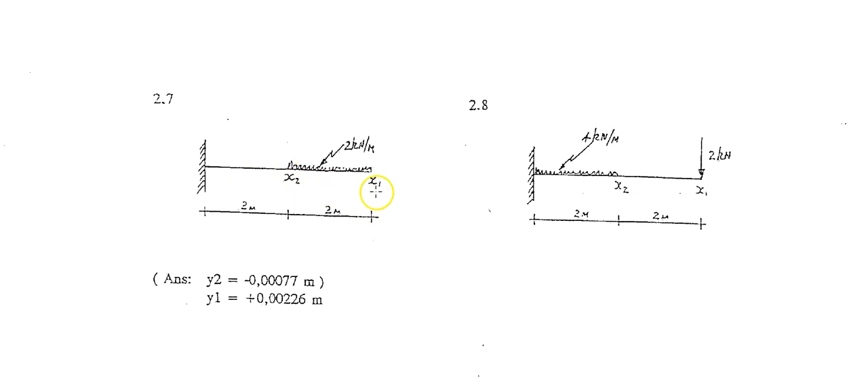Because it's bending down like so, there's a slight deflection, and the biggest deflection will be at x1, which is y1. Right, I've drawn it there.

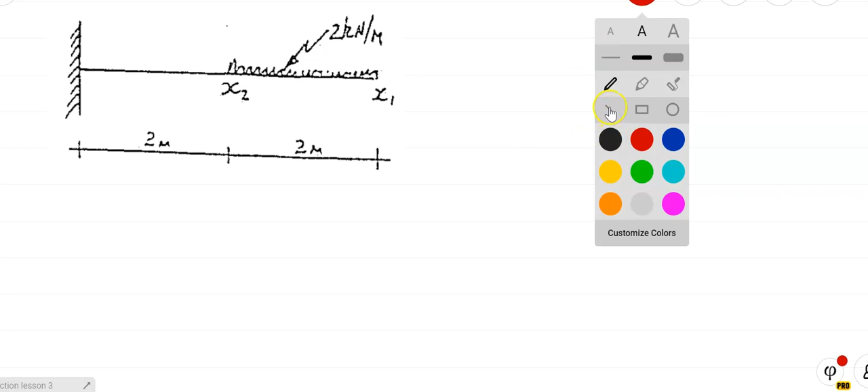So before we can start, we need to calculate the support reaction. There's definitely going to be a VA, like so. I'm going to call that V, let's call it A. Okay, VA.

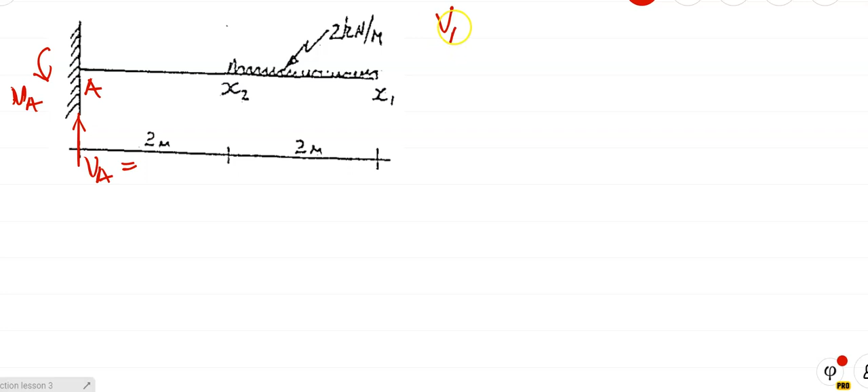And of course, there's definitely going to be a reaction moment like so. Because the beam wants to turn this way, the reaction will go the opposite way. VA is easy - by inspection, VA will be 2 times 2, which is 4 kilonewtons, going up.

Sum of the moments about A is equal to 0. So that's an anti-clockwise reaction moment, plus the one on the beam will be 2 times 2 times the lever arm. The lever arm goes to the center, so it's plus 2 times 2 times 3, plus the value times the length times the lever arm, which equals 0. Therefore, the moment at A is equal to 12 kilonewton meters. Quite easy, no?

Yes, very easy compared to the previous one. So it's 12 kilonewton meters.

And as we said before, we're going to take moments about the right hand end. So X is starting from there and going the other way. I'm taking moments on the right hand end, and by the way, E is given in the problem as 200 gigapascals, which is the same as 200,000 Newtons per millimeter squared. You should know that by now.

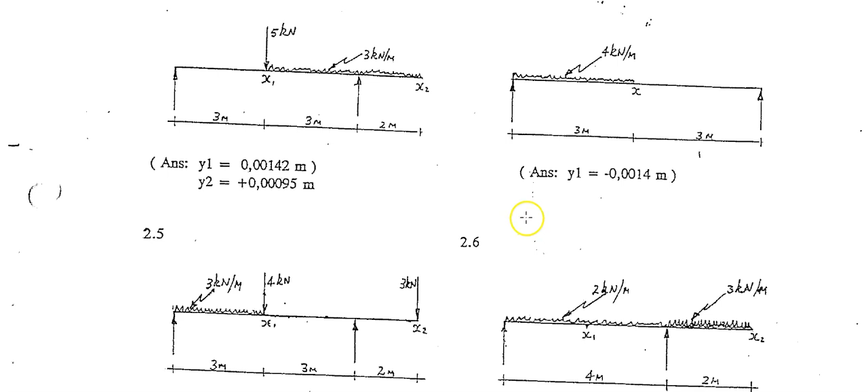Now, if I flick back to the notes, it says the beam width and I section is that. So what we need to do is go to the steel table and pick out section 356 by 171 by 44.8. From that value, I see that Ixx is equal to 121 times 10 to the power 6 millimeters to the 4th. So it's not given, you need to pick it out from steel tables.

I'm taking moments about the right hand end of the beam, and I'm going to set up my bending moment equation in terms of Macaulay. Let me change the color. So I'm going to say the moment at X can be written as EI, d squared y dx squared.

I'm taking moments right here. At the left hand end there, I have a moment of 12, but it's an anti-clockwise moment, so it's minus 12. At the left hand end, I've got a moment of minus 12 kilonewton meters.

Moment with regard to that force there, it will be plus VA times - remember all distances are in terms of x - so it's times x, that's it, times x.

And the UDL is anti-clockwise with respect to the right hand end of the beam, so it's minus 2 times, what's the length of it in terms of x, x minus 2, times half of x minus 2. Remember, the UDL has gone to the end of the beam, so it's 2 times x minus 2 times the distance from there to there, which is half of x minus 2, so therefore it's x minus 2 all squared. So that's the bending moment equation.

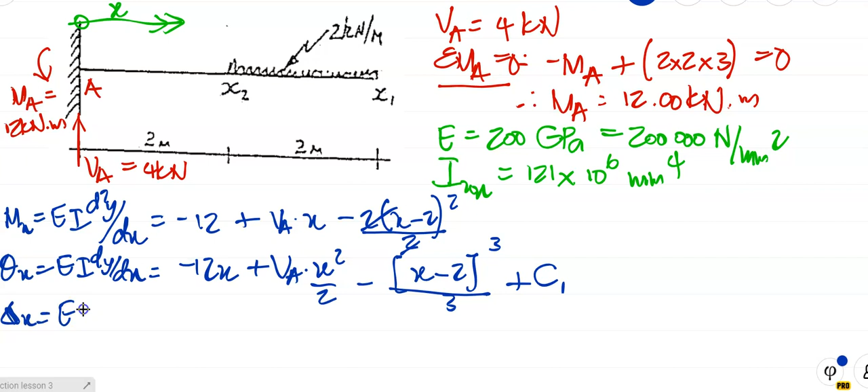...deflection equation. So it's EIY is minus 12 x squared over 2, plus VA times x cubed over 6, minus x minus 2, keep the bracket square, to the power of 4 over 12, and of course when you integrate the constant it becomes C1 times x, plus we get a second constant of integration and we call it C2.

We need to determine C1, C2, and once we know C1, C2, if we put the value of x in, we can determine y, because we know what E and I is. But we're going to do that at the boundaries, along a boundary condition.

What do we know? We know that at A, the deflection, sorry, at A, x is equal to 0, and y is also equal to 0, because it's been held in place there. So it's not going anywhere. So at A, x is 0, y is 0.

I'm putting all of this into that. So that's going to be 0, that's going to be 0, that's going to be negative, so it's 0, that's going to be 0, that's going to be 0, so therefore naught is equal to C2. So C2 is 0. So our first constant of integration, C2, is 0.

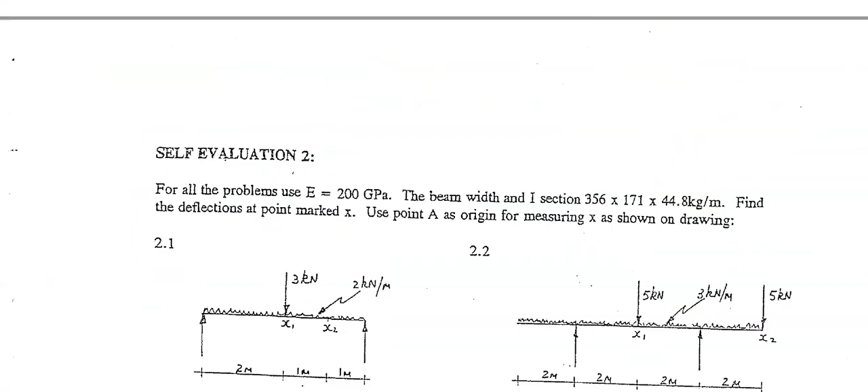And I get minus, why is it minus? Because it's deflecting down, it's below the zero line. Minus 2.26 millimeters. Okay, and if I go back to the answers, there we go, X1 is Y1, the deflection at X1. If I multiply that by 1000, I get 2.26 millimeters. So that's correct. So the deflection at the far end is 2.26 millimeters.

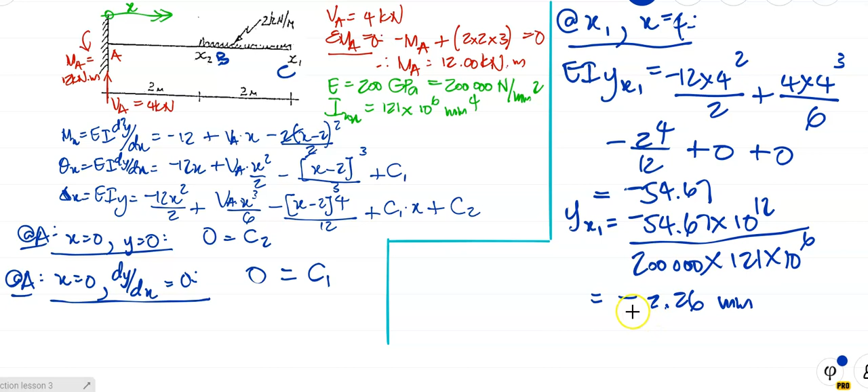The next one, the question says find the deflection at B. We do the same thing, but X is equal to 2. So at B, or at X2, X is equal to 2. Do the same thing, see what you get. So I'm going to say at X2, or B, or B if we wanted that. X is equal to 2 meters.

And because we want to find the deflection, we put this in the deflection equation. So I'm going to put X equal to 2 in that equation there. So EI, so EIY at X2 is equal to minus 12 times 2 squared over 2, plus VA, and what's V? V is 4, so plus 4 times X cubed, X is 2, so it's 2 cubed over 6. That's going to be zero, so it falls away. That's going to be naught, that's going to be naught, so it's just that there.

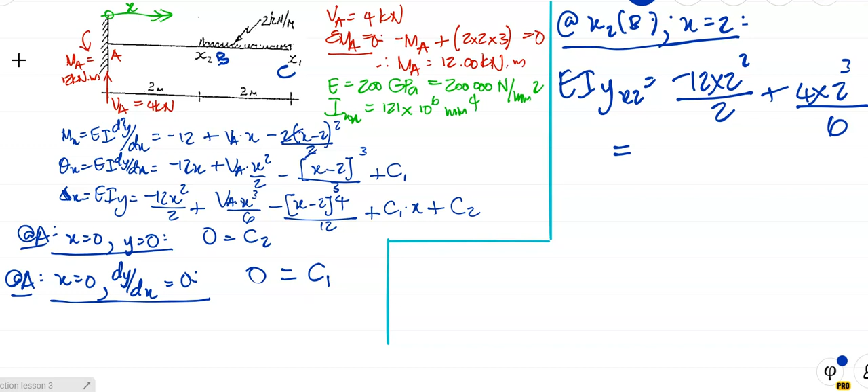Okay, so check what I get. And you should have gotten minus 18.67. And of course, now we're making Y the subject of the formula because we want to find the deflection. So Y at X2 is equal to minus 18.67 times the conversion factor, over EI, which is 200,000, and I is 121 times 10 to the power 6. Check my answer, you should have gotten minus 0.77 millimeters. And if I flick back to the answer, that's 0.77 millimeters there. Okay, that should actually be a minus there, not a plus.

Okay, so people, that is our, notice that cantilever is a bit shorter, not so much work. But the only essential difference is, remember, when we sum moments there, if the fixed end is on the left side, do not say minus 12 times X, that will be wrong, that will become minus 12X squared over 2, and that's all wrong. We're summing moments, the 12 is already a moment, so we just record it as that, and of course that's force times distance, and that's force times distance. Get the moment formula there, integrate twice, and then put in the values at the boundary conditions.

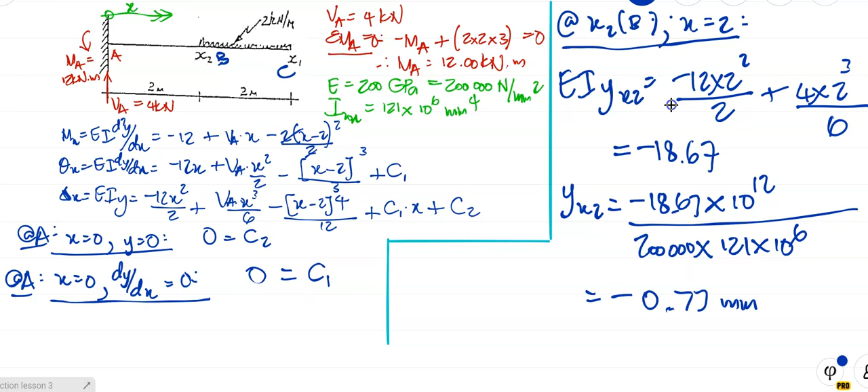If I go back to the notes there, oops, that's a bit too fast, didn't I? It went a bit nuts there.

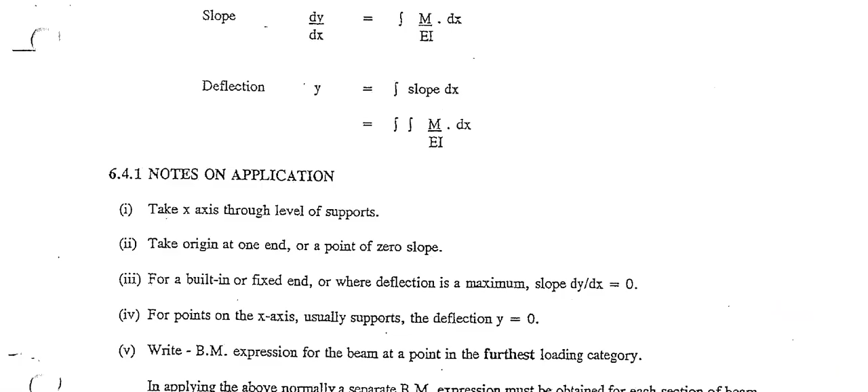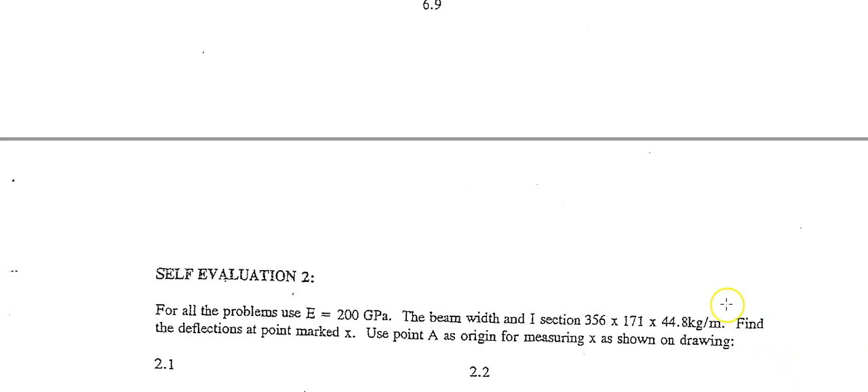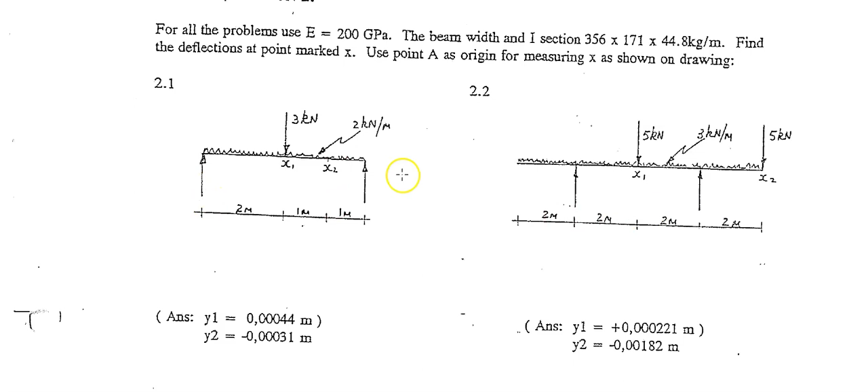6.10, right? Okay, so on page 6.10, self-evaluation, there's beams there. So work through all the ones I gave you in my handout there, and also work with these ones here, X1, X2. X1, the corresponding deflection at X1 will be Y1, so that means the deflection at X1 there is 0.44 millimeters, and at Y2 there it is 0.31 millimeters, or you can leave it as meters, just don't get the units mixed up. Okay, there's the beams, there's the answers. Find the deflection at all the X1s and X2s, and the answers there are given for all of those ones.

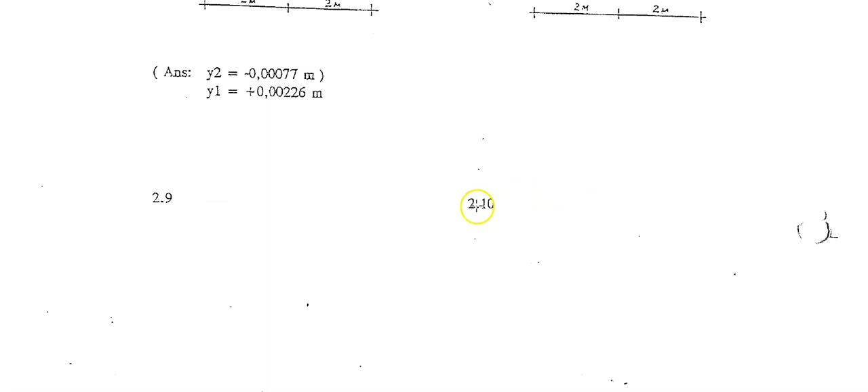I just did that one. There's another one there with a point load at the end there and a UDL over there, and there's another 8 or so to do. Okay, people, do all of them.